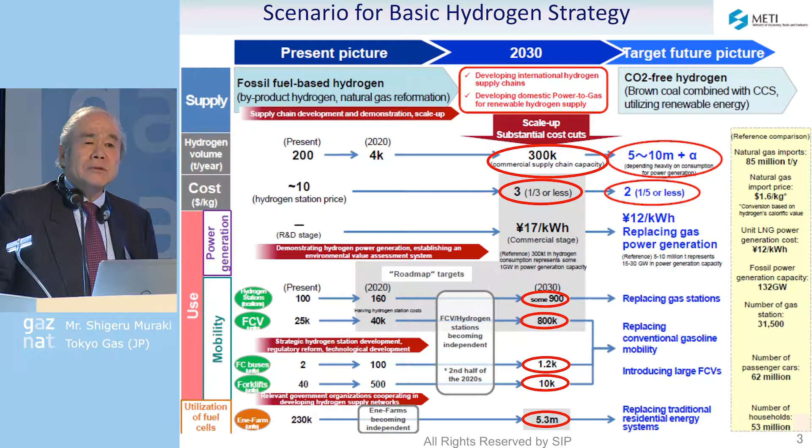And this strategy also describes that ammonia will be introduced to the energy market by the middle of the 2020s, leading the introduction of hydrogen energy carriers in the energy market.

This is the 11 themes of SIP, the Strategic Innovation Promotion Program. The themes are varied, such as next generation power electronics, automated driving, cyber security, and production of ocean resources.

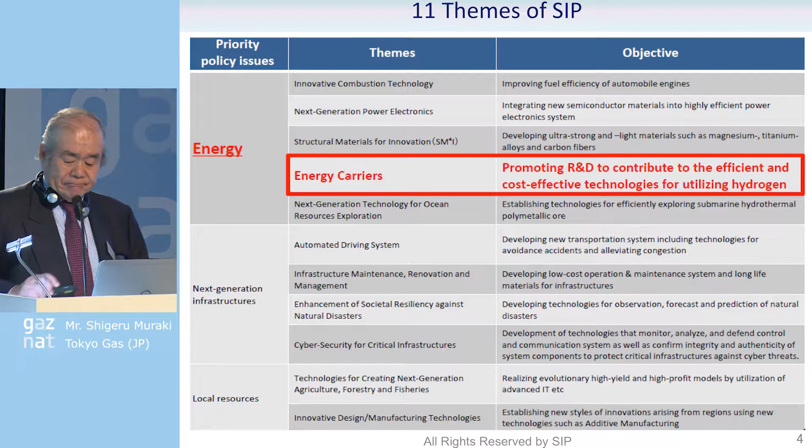And energy carriers, as I mentioned, is one of those 11 themes to promote research and development to develop efficient and cost-effective technology for utilization of hydrogen. This is the basic scheme of our energy carriers project, which I'm in charge of as program director.

We are focusing on 3 energy carriers: liquid hydrogen, organic hydride, and ammonia, and the production of carbon-free hydrogen from renewables, and the technologies related to the energy carriers, and dehydrogenation to produce hydrogen and use hydrogen in power generation.

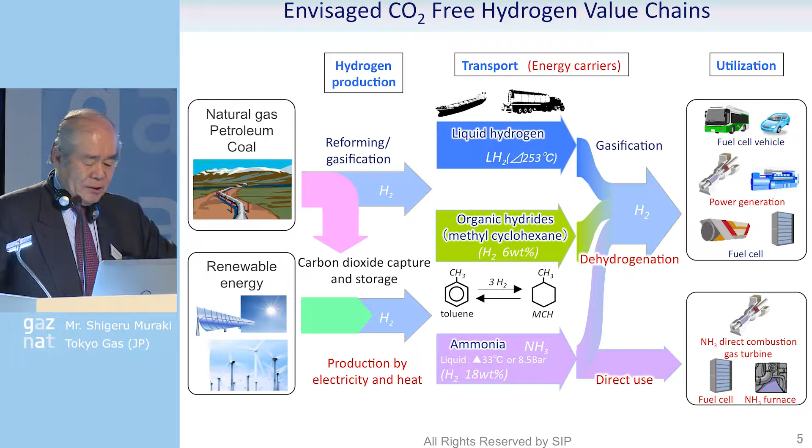And also, the main part of our project is the direct use of ammonia in gas turbines, fuel cells, industrial furnaces, and marine engines. I'll explain in detail later.

This busy chart shows the total programs or projects of hydrogen-related research and development in Japan. Those red dotted projects are covered by our project: hydrogen production from solar heat, and mainly the ammonia-related technologies and utilization of ammonia. Other areas are covered by different organizations and the Ministry of Economy, Trade and Industry.

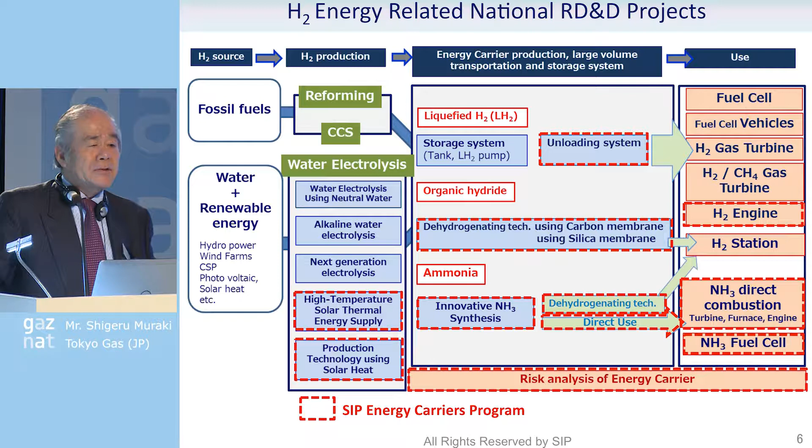And I will explain some key achievements in ammonia utilization. First one is the gas turbine. We succeeded in developing a small gas turbine manufactured by Toyota Group, 50 kilowatt and 300 kilowatt, fueled by ammonia, without a significant increase of NOx, because one key issue in ammonia combustion is how to control the fuel NOx from ammonia. Toyota is planning to commercialize 50 and 300 kilowatt micro turbines using ammonia by 2019.

Second one is mixed combustion in coal-fired power stations. We tested the burner up to 20% mixture of ammonia without increase of NOx, because the combustion burner for pulverized coal has the technology to control fuel NOx, since coal has fuel NOx. And we tested in an existing 156 megawatt coal-fired power station.

It was a 1 week test of the mixed combustion of ammonia last June. We conducted the test very successfully, but unfortunately, because of the capacity of ammonia in this power station, which is used for the DeNOx substance, the capacity was very small. So the percentage of ammonia mixed in this coal-fired power station was only 0.8% to 1%.

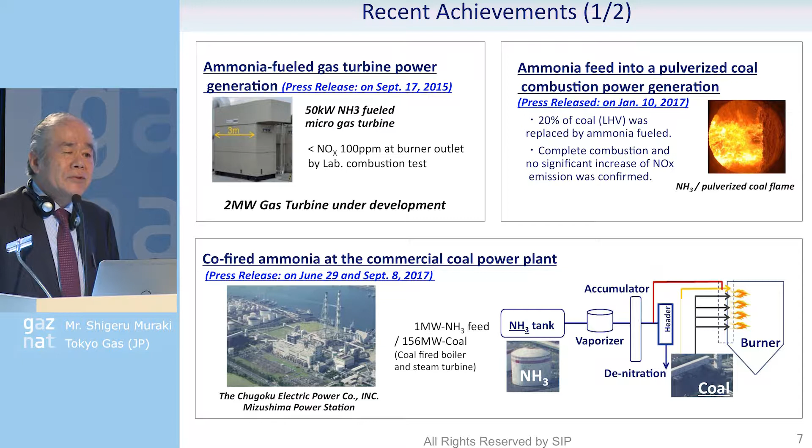But the test was very successful, and so the power companies are now moving into the basic design of mixed combustion of ammonia in coal-fired power stations.

Next one is ammonia utilization in industrial furnaces. I believe that ammonia is the most potential carbon-free fuel for the industrial market because of its combustibility. Hydrogen combustibility is too high, so the speed of combustion is too high, so it doesn't fit with industrial furnaces.

We are developing solid oxide fuel cell. The cell stack is manufactured by Noritake, and the system is packaged by IHI. We are testing a 1 kilowatt cell system very successfully, without any differences from the fuel cell running on hydrogen.

This is a solid oxide fuel cell operating at about 750 degrees centigrade, so the temperature can easily dehydrogenate the ammonia to hydrogen.

This is an advanced combined cycle gas turbine we just started to develop with Mitsubishi Hitachi Power Systems. In this case, because the combustion temperature is too high, to control NOx emissions we dehydrogenate the ammonia and produce hydrogen, then supply hydrogen to the combustor. So this is hydrogen combustion in this ACCGT. Because an ACCGT has about 600 degrees exhaust heat, we can use this exhaust heat to dehydrogenate hydrogen from ammonia.

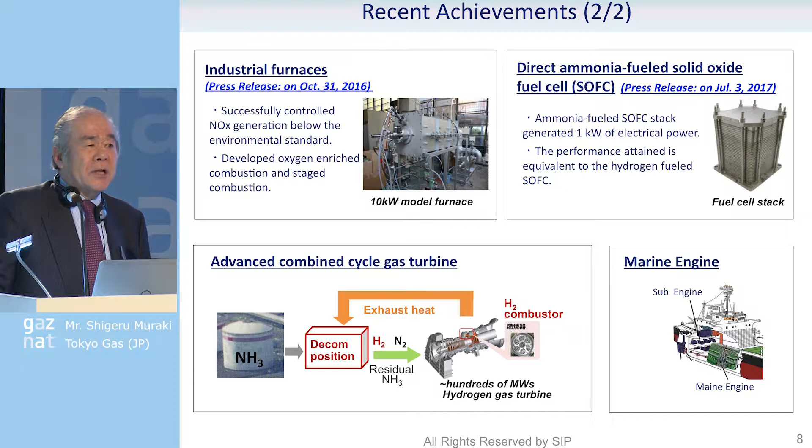We also started development of a marine engine. I believe marine ammonia can be the most potential carbon-free fuel for marine transportation, same as the industrial market.

This shows the cost comparison between different carriers, hydrogen and ammonia. Those three bars show the hydrogen production from renewables and carriers, and then dehydrogenate or gasify to use as hydrogen.

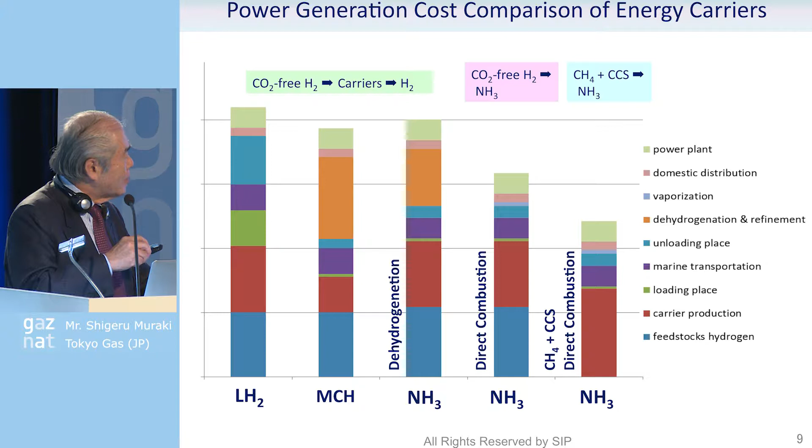This is the cost. This is ammonia from renewables that, without dehydrogenation, is directly used as ammonia. And this is conventional ammonia plus CCS, used as ammonia, the direct fuel for the energy market.

Current market price of ammonia is $12 to $16 per million BTU. It fluctuates based on the fertilizer market. So we are targeting the price of ammonia around $15 to $16 per million BTU with EOR and CCS.

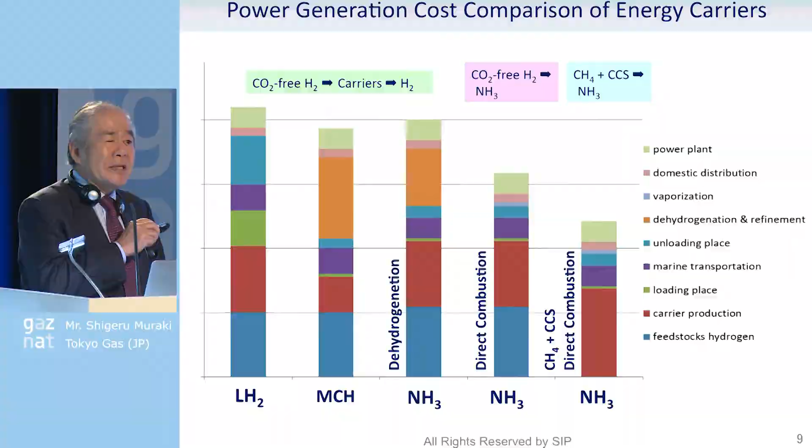But this is the current cost. Those other costs, more than $25 per million BTU, are future costs. So you understand how ammonia is competitive among those three carriers if we use ammonia directly.

So why ammonia? The hydrogen content per volume of ammonia is highest among the three energy carriers, so infrastructure cost will be less.

And transportation and storage technology is already there. As I mentioned, ammonia can be directly used as a fuel without carbon dioxide emissions. But NOx emissions in ammonia combustion can be controlled by the technology.

Ammonia is a toxic chemical, but widely used in industry, so safety measures are already common practice. And CCS from ammonia production is a feasible option.

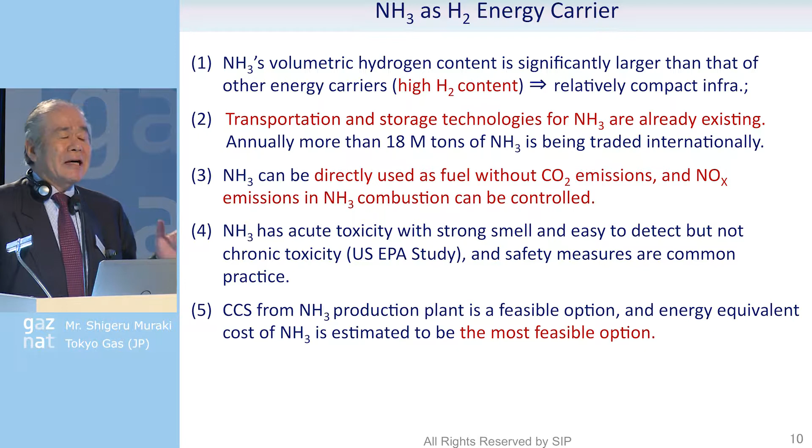The reason is ammonia production emits a lot of carbon dioxide, but about 70% of the carbon dioxide comes from the chemical process, the steam reforming process. It emits pure carbon dioxide, not necessary to separate nitrogen, so it's easy to capture and store.

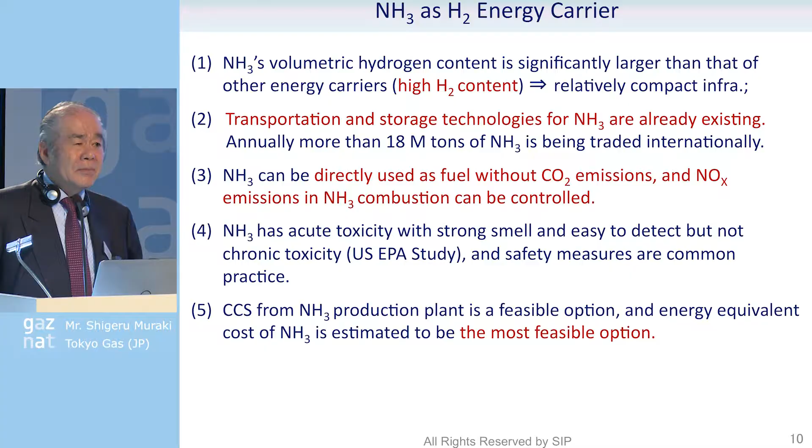The remaining 30% is flue gas. We have to separate nitrogen before going into the CCS. So I think the CCS cost is less than the emission cost from power generation.

This is our plan to develop the carbon-free ammonia value chain. We use existing technologies, the Haber-Bosch production process from natural gas with CCS and EOR, transport, and technology to utilize the ammonia directly in different markets.

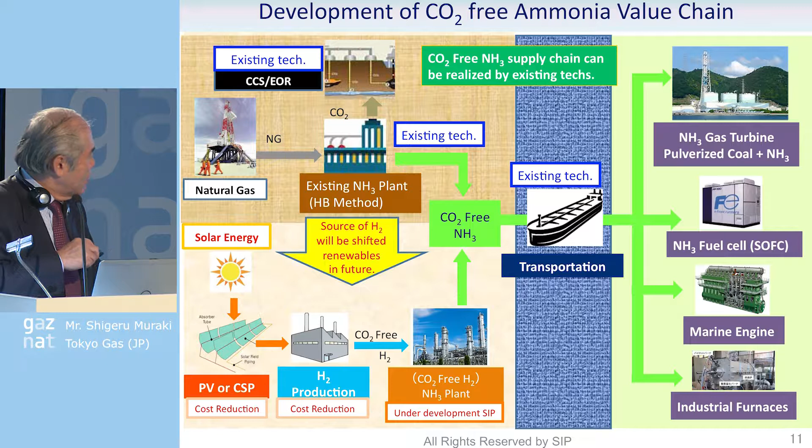In the future, we are looking at the possibility to produce ammonia from renewable energies, but the cost is still very high. It will take some time.

Because of this progress, we established the Green Ammonia Consortium in our SIP project, in July last year. This Green Ammonia Consortium will promote and lead development from industry, produce an ammonia roadmap, and create collaborations within industry and between industry and government.

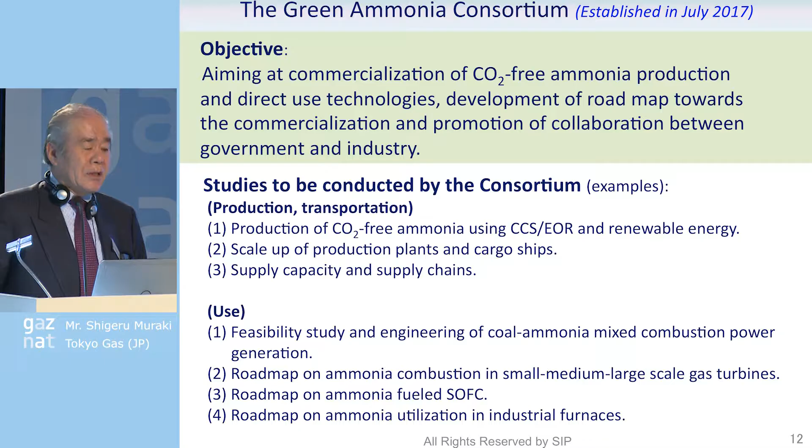We now have 26 companies and institutions in this Green Ammonia Consortium. We have 5 power companies in this consortium - those are the potential users of ammonia.

And we have Toyota Group, and also engineering companies and trading houses in this consortium. We are planning to open this Green Ammonia Consortium in April next year, so any company or institution interested can join.

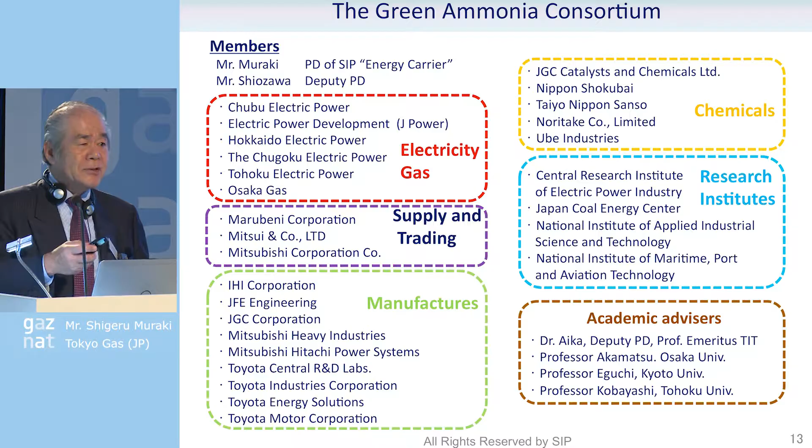That's internationally open. This is the roadmap this Green Ammonia Consortium produced. We are discussing with some ammonia suppliers in the Middle East and US Gulf, and targeting to start the introduction of carbon-free ammonia with CCS and EOR before 2025, possibly 2024.

We are discussing with one of the ammonia suppliers in Norway to launch a small demonstration program. They plan to use hydrogen from renewables and supply it to an existing ammonia plant to produce a small amount of carbon-free ammonia, deliver it to Japan, and use this ammonia in the Toyota microturbine to produce carbon-free electricity, planning to supply to the Tokyo Olympics and Paralympics area in 2020.

The small gas turbine I mentioned will be commercialized by 2019. A middle-sized gas turbine will be commercialized by 2024, when this carbon-free ammonia comes into the Japanese market.

The large-size gas turbine advanced combined cycle will be commercialized by 2027 or 2028. Mixed combustion with coal technology is already here, so we have to retrofit existing coal-fired power stations and install the ammonia supply system. It takes a few years, so we are targeting to start real use of ammonia in coal-fired power stations by the time carbon-free ammonia comes into the Japanese market.

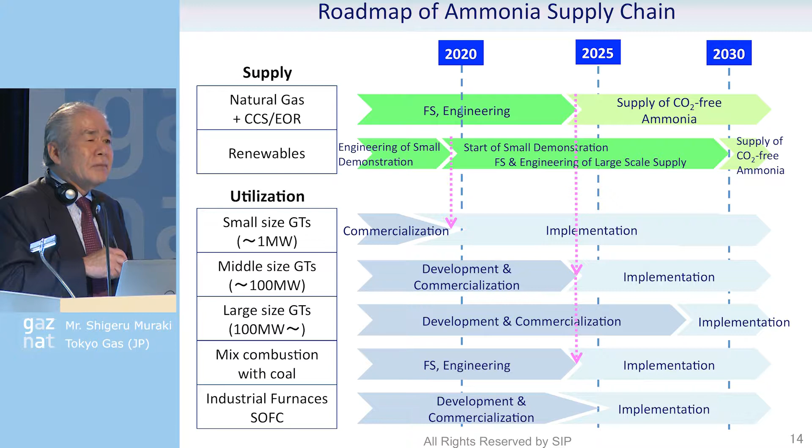Hydrogen will also be used for transportation, and we're trying to realize a smart community utilizing hydrogen and hydrogen energy carriers with IT technologies.

Last night someone asked about hydrogen use in the Tokyo Olympics. We are trying to promote this, however the Olympic site is strictly controlled for safety and security, so we found it would be rather difficult to introduce new technologies on the site. So we will do something outside the site and supply green energy to the site.

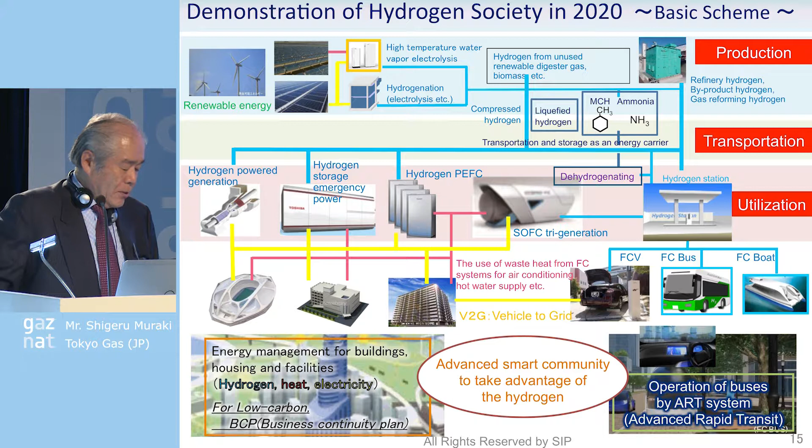Toyota will introduce 100 fuel cell buses at the time of the Olympics, and will also provide official cars, fuel cell vehicles, for official cars in the Tokyo Olympics and Paralympics. So our challenge is to realize key carbon-free energy sources in the future and contribute to the decarbonization of the energy market.

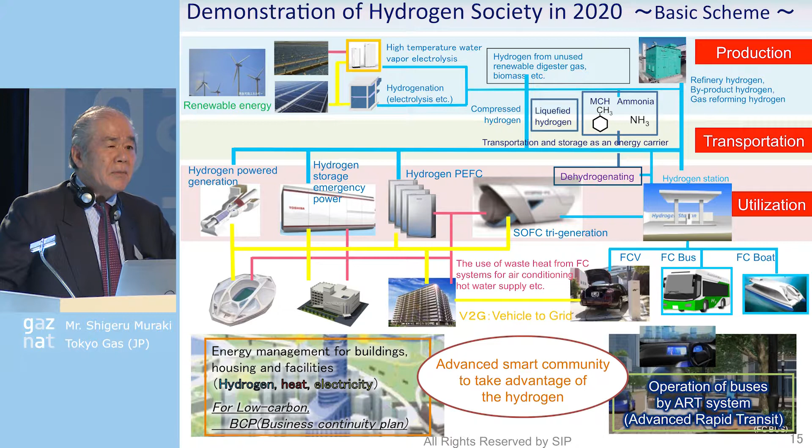Merci beaucoup. Thank you for your presentation.

Maybe you said it, but it was not clear for me. Why do you prefer ammonia instead of staying with hydrogen? Because, of course, it implies some efficiency losses and so on with all those conversions. So why ammonia instead of staying with hydrogen?

Of course, we are looking at hydrogen introduction in the future, but cost makes it difficult to introduce hydrogen in the power generation sector and industrial sector. So ammonia can come into those markets at an earlier stage and create a mass supply chain of ammonia, which can produce less expensive hydrogen for the other market. So that is the step-by-step approach.

Of course, liquid hydrogen can come later. So the scheduling and how to make these carbon-free fuels available in the market, that is what we are trying to do. So ammonia could lead the hydrogen introduction and the hydrogen society.

Thank you very much for your presentation. I think Japan is always very ambitious in this target, and I think you showed it. If I understand, in Japan there was strong resistance in refrigeration to use ammonia. Do you think you will be able to overcome this resistance? I fully agree it can be mastered, but usually in the past in Japan it was difficult to introduce ammonia refrigeration, even though it was a very good refrigerant.